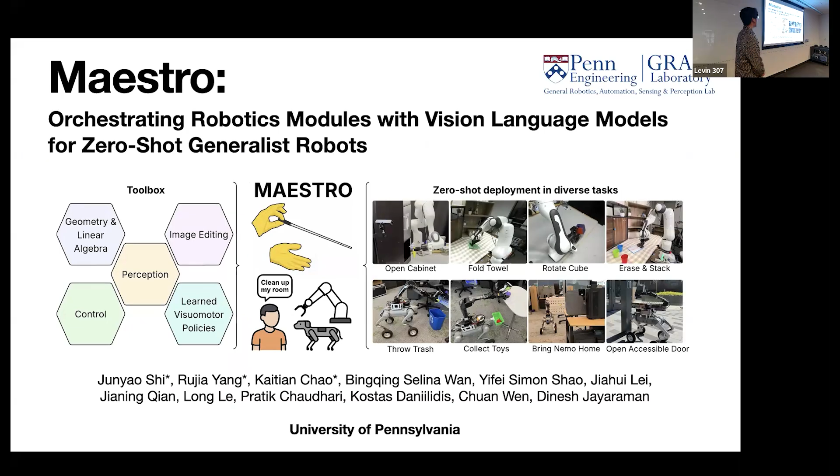So now I'm going to transition to talking about how you view robotics as a tool use scenario, and how we can use tool use agents to enable general robots, and get a generalist modular system if you use them correctly. The work I'm going to focus on is called Maestro, orchestrating robotics modules with vision language models for zero-shot generalist robots. On a high level, Maestro starts from a large toolbox, and it's pretty important to curate a very high quality set of tools.

The coding agent or tool use agent will decide, given my current scene, what are the relevant tools I can use to execute my task. Then you decide, maybe I need to generate a plan for the next bit of the task. For example, if I'm cutting the banana, I need to move the knife above the banana. Then you execute that, and based on the execution results, you see them in images and log them. Having access to the previous prompts, history of execution, and tools, you decide: did I succeed? If I succeed, I plan the next bit of task. If I didn't, I have to replan to finish the current bit.

This is based on two key insights I've had. The first is that VLMs can use tools, right? Tool use agents are very good at using tools. So let's scale up the number of high quality tools we have. This comes from a basic understanding that a lot of robotics modules, even things useful to robotics, are usually expressed in code or can be interfaced using code. That's why I have a large set of many tools that we can call, ranging from perception and geometry to control methods, collision avoidance, to even VLA policies like pi 0.5, or image editing.

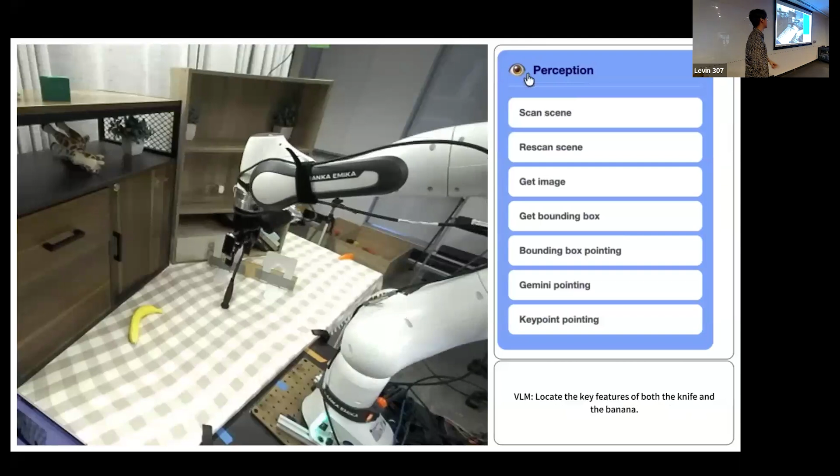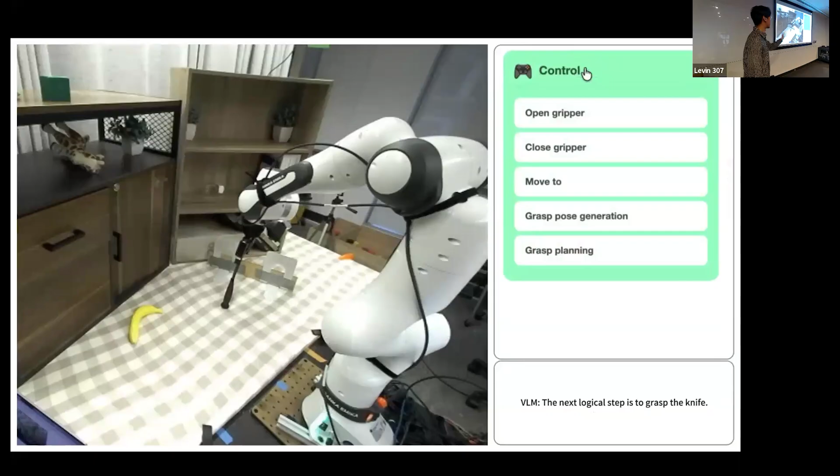Here's a simple illustration of how this works. Notice I have a cursor clicking the different methods, but that's actually just a visualization, in reality I'm not choosing what it should be using. The tool use agent just naturally chooses by itself what kind of modules or tools it will use.

At the end, I'll show some analysis that shows it sometimes even chooses various different tools, depending on what the task is doing. With just this one interface and coding agent that has all of these tools, I'm able to use the same stack and system and give it any kind of task, even not on this robot, on other robots, and it's supposed to do something usually quite reasonable. Based on our access to open source VLA models, it's definitely much better, performs much better than the open source VLA models we have access to.

So I can zoom in a little bit on the tabletop results, because there's also mobile manipulation results. In terms of tabletop, I'm comparing to the previous state-of-the-art work that uses this code-as-policy strategy, as presented in the Gemini Robotics technical report last year, and also compared to two state-of-the-art VLA policies, the vision language action models: Pi0 and Pi0.5. The way I evaluate this, I try to be very systematic and general as much as possible.

So you can see these are some examples of my evaluation. Every trial is different. I'll give it new objects, disturb the visual axis, change the object position, even change the language I give it to the system. This is following a recently proposed way of evaluating generalist robotics policies called Stargen, and you guys can look at that work for more details.

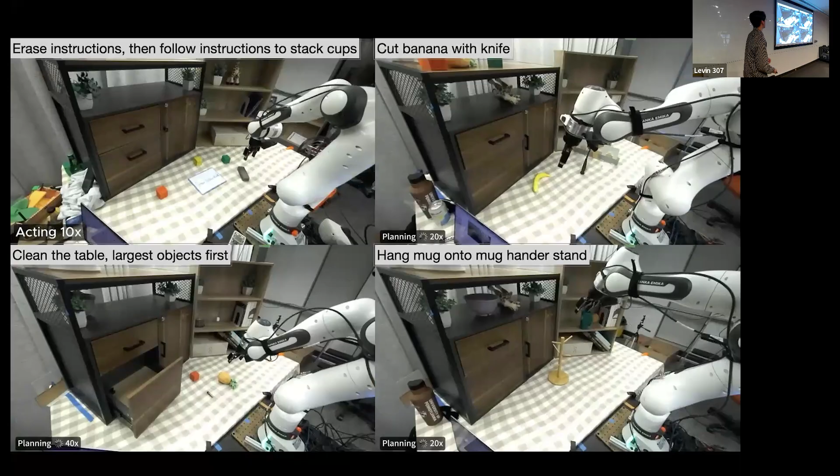For example, on the top left we have a memory task where you have to erase the instruction for doing a certain task, and then the robot has to follow that instruction and stack the cups using the instruction. So there's a lot of memory involved.

And here as well - clean the table, largest object first. It has to reason first, understanding these are the objects in the scene, these are the largest ones, these are the smallest ones, and this is the order of how I need to clean up the objects. There are also other tasks where you have to reason about using tools, or reason about the geometries, like a mug stand, for example.

So there's definitely a lot of reasoning and planning here, and I think being able to use different tools in a closed loop fashion definitely helps these very challenging scenarios, otherwise for like end-to-end policies.

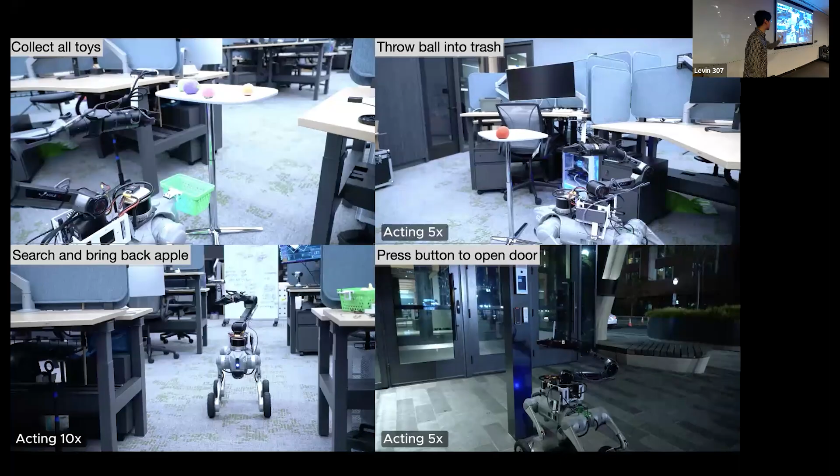Another good thing about this kind of method is that I just need very minimal change in how I control the robot at the low level, which is anyways just giving it as an API usually. And now I can just move the system onto a new robot without collecting new data. This is also AGH, various different places in AGH.

I can just deploy this system on a mobile manipulator. For example, let's focus on this one: search and bring back an apple.

This policy has to start all the way in the back of the room, where the apple is, and it is all the way over there on the other side of the room, and it has no vision of where the apple is. So this definitely requires a lot of long horizon planning, memory, and understanding where I am in the room and so on. But it's able to go around, try to look for it, walk towards the apple, and finally see there's an apple, and bring it back.

I'm sure if you collect a bunch of data here, this robot can do it, but I think for me it's very satisfying to see that the robot is able to do that without any data collection. Today is kind of difficult, but in my previous group meetings with Dinesh, we would actually just grab the robot in the room and say, hey, what do you want the robot to do? And have some objects on the table, and it's supposed to just zero-shot be able to do that, which is pretty cool.

And sometimes even when you make a mistake, it's supposed to reason about, oh, this is a mistake I had, so let me try again with a different plan.

Yeah, what's the another... this agentic system versus the traditional TAMP system?

In a traditional TAMP-based system, you still have to manually describe, oh, this is how I use tools, this is a library of concepts I have, this is a tree and graph of how these concepts relate to each other and so on. Here, this is much more like a flexible endpoint.

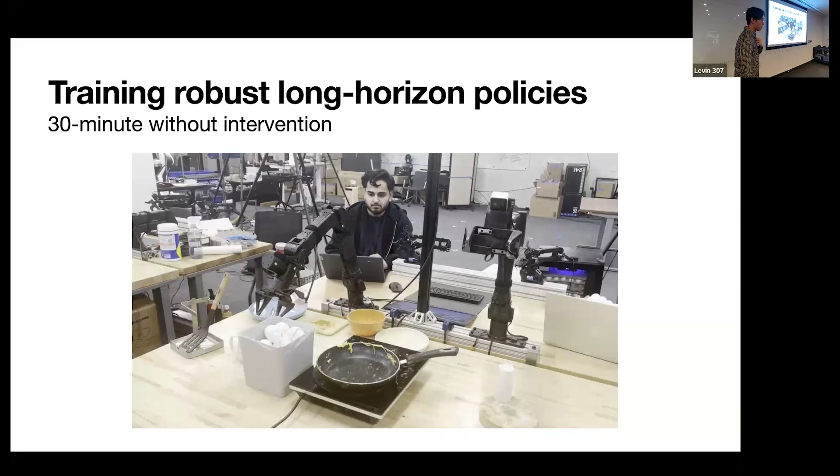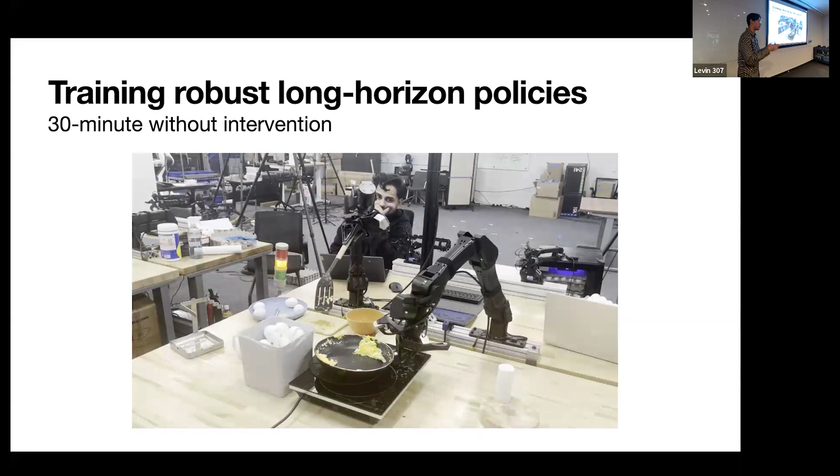The hope is that this research doesn't take away from all the previous stuff I said, that learning robotics from alternate sources of knowledge, but more like, okay, once we have that brain, once we build that, how do we convert that into something that's performant with limited resources in terms of robot data and so on, and also robust, so we can deploy them in useful scenarios.

So it learns the whisking time and how to break an egg and all that from video, generalizing from videos. So there's definitely part of the knowledge that it learns, not just from robot data.

As we said, for example, learning to localize an egg, because the eggs look the same, but if you actually need to grab them, no single egg is the same. Also take a look at how the cracking is happening here. We introduce it just like how humans crack eggs - we need to drop it, and it produces a crack, then we pick it up, and the other hand has to look at where the crack is and pull the egg open. Every time you drop it, it's a different type of crack.

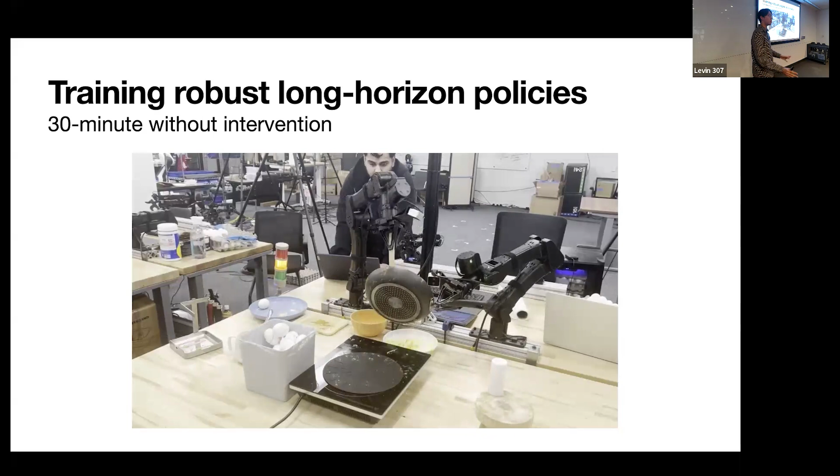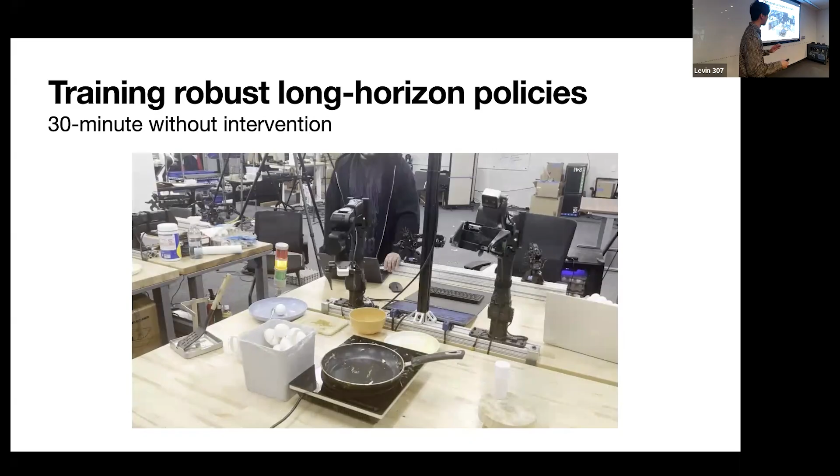So basically, my point is learning all of this from pure robotics data doesn't make a lot of sense to me. But there's also definitely things about low level stuff, like how do I touch an egg, what actually constitutes pulling and so on, that can be learned from useful, high quality robotics data. But I think it's a combination of both.

Cool. Anyways, so the key takeaway of my talk is that if there's one thing, it's that robot data is very useful, definitely. But not all robotics knowledge must come from this type of robot image, robot action style data, in the future where we have generalist, general purpose robots. Oh, oops. Yeah, that's the end of my talk. Thank you.

No question? Okay, yeah. I mean, you should - let me just understand the tool.

So in Maestro, basically you're using this higher level orchestration layer, right? So it chooses - cool. Yeah, much like how Claude Code chooses different MCPs.

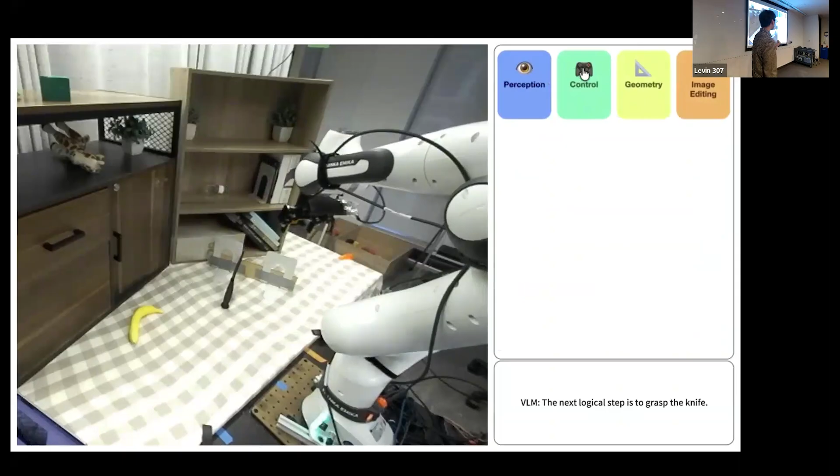Now these particular tools, do you provide them, like these dozens of tools, beforehand? Very good question. So in this product, I do, because in the beginning I didn't want to, but I realized that just like in Claude, you sometimes have to specify, oh, these are the high quality tools that are relevant to my task, these are the MCPs that I want to choose. I found out that if you introduce a bunch of low quality tools, you'll sometimes be in vicious cycles of correcting the mistake but not being able to use the right tool. So I did have a lot of tools that I curated, but I handpicked them because I know they're reliable and high quality. So quality is very important.

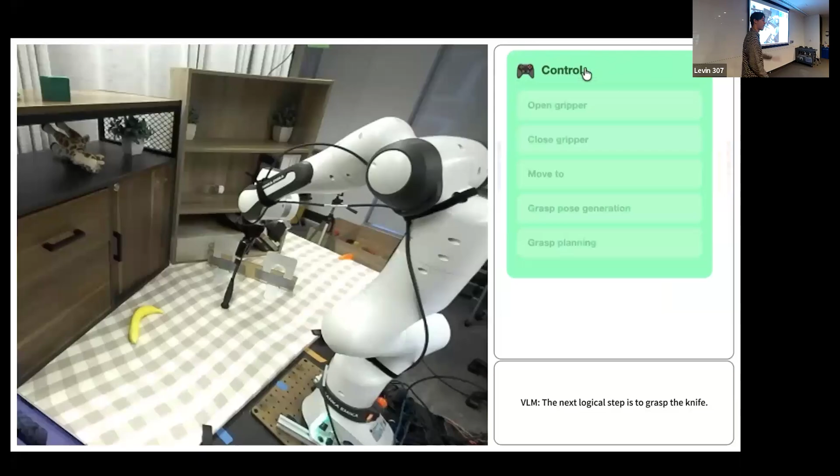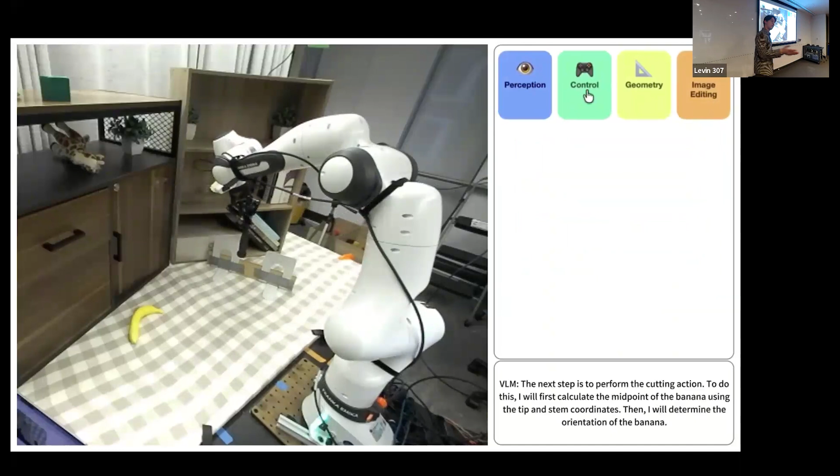However, there's another PhD student in our group called Yifei, and he recently had a tidy-bot, like autonomous tidying project, which on some level is kind of related, where he uses OpenClaw, if you guys know what that is. Basically, to my understanding, he doesn't have a pre-specified list of tools, and the agent can just go on the internet, read what people say, and choose the best tool corresponding to that. I think - start a tool. If anyone has used OpenClaw, you know it's kind of like a self agent that can do a lot of things. So there's a chance for that, but I think you trade off some at execution time.

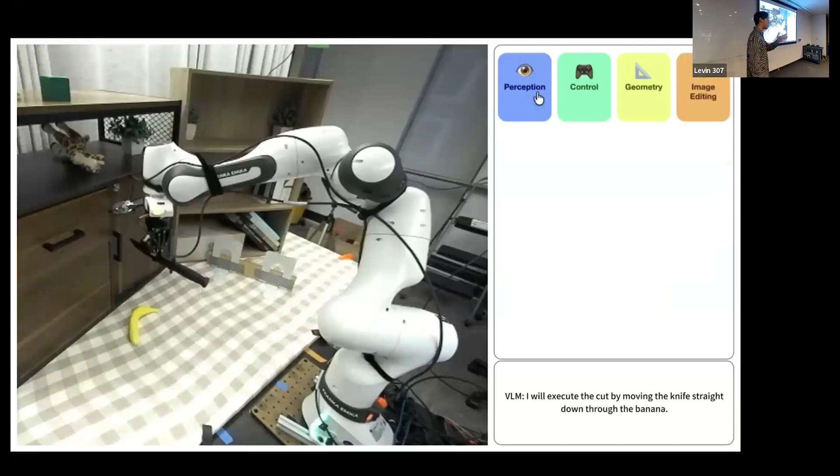If you have lower quality tools in your tool set, then you make more mistakes and you think longer. So, for example, the tool of moving.

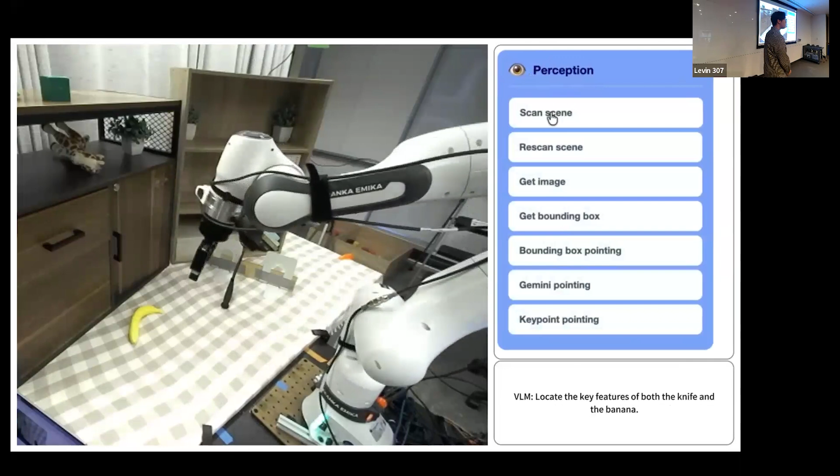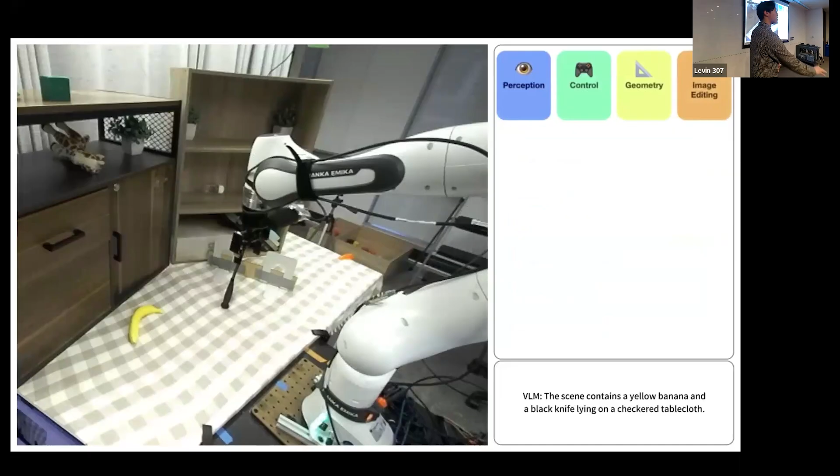Is the tool like standard IK, or is it a VLA that produces a different reasoning? You can choose either. Sometimes it's just moving by using IK, if it can compute, if it can use the 3D information it's seen to compute the pose for like right above the banana.

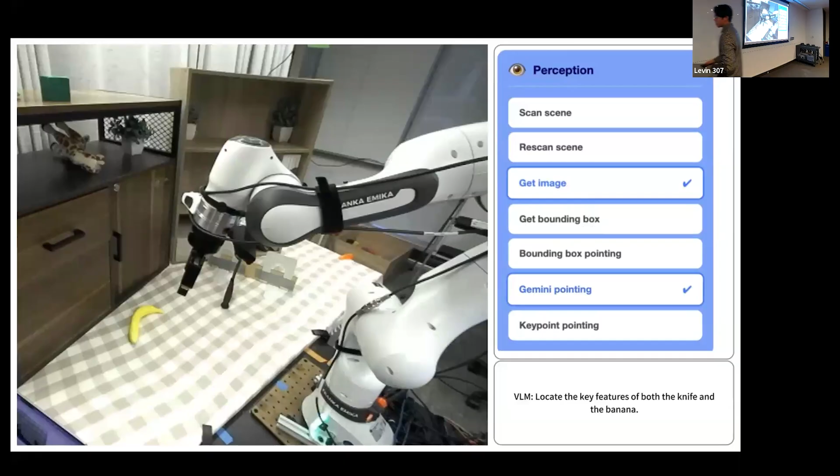Actually, I think I have a better example of this if we just look at this video that my collaborator made last night, on the project website. So basically, I go forward. It kind of has different perception of where the objects are, and sometimes they have object positions expressed in 3D and so on. Obviously in this example there's no VLA being used, but you can imagine using a VLA is pretty much like that as well.

So if it decides to call the VLA using some language command, like stack the orange block and green block, you can do that as well.

If you've run this a few times, can you optimize the speed? Yeah, that is a very good question. Yes, because you don't make mistakes anymore if you have a better understanding of what didn't work. Actually, I have results where I can run multiple trials, and over time, if it has context of how the execution went in the past, it improves. There was an example where it was only opening the cabinet 30%, but over 4 different trials, it opened 100% by looking at the previous results, which I didn't include. But I think that's a good point, and it's something I'm thinking about for the next stage of this project.